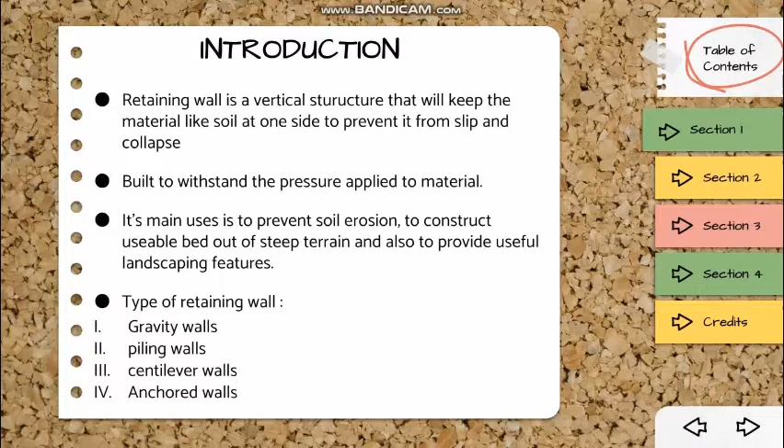As we all know, the retaining wall is the vertical structure that will keep material like soil at one side to prevent it from slipping and collapsing. It is built to withstand pressure applied to the material, such as earth pressure and hydrostatic pressure holding back. Its main use is to prevent soil erosion, to construct usable land out of steep terrain, and also to provide useful landscape features.

Bismillahirrahmanirrahim. My name is Muhammad Idham bin Buang. Now I will discuss our case study in section 2.

This is the retaining wall at Beverly Hills, Tanjung Bungah, Penang, 2017. This is our view on this case study. As you can see, they have a retaining wall.

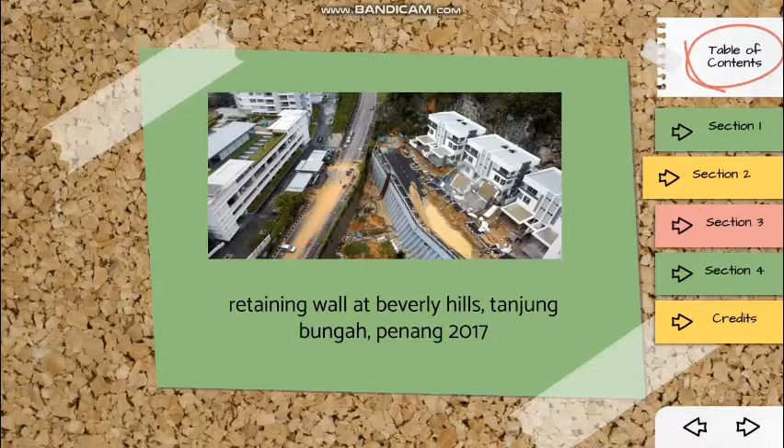About the case study: the retaining wall was used for a new development of private residential houses situated on a hilly area, comprising 20 units of 3-story semi-detached houses.

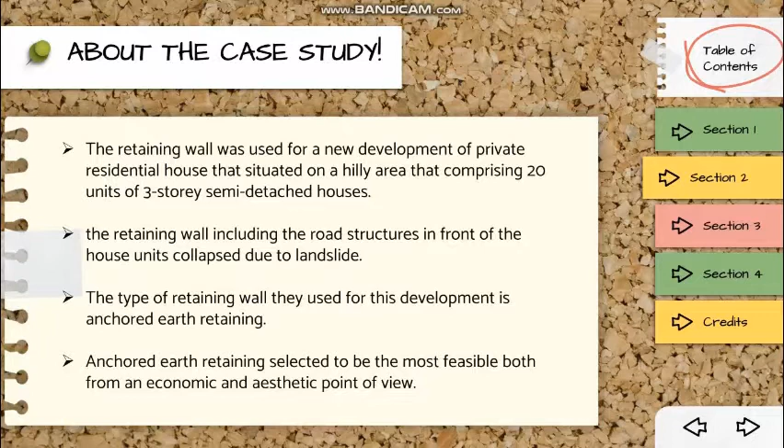The retaining wall, including the road structures in front of the house units, collapsed due to a landslide. The type of retaining wall used for this development is anchored earth retaining. Anchored earth retaining was selected as the most feasible option, both from an economic and aesthetic point of view.

So the factors of failure on this retaining wall are: first, heavy rainfall, and next, the high water table in the underground.

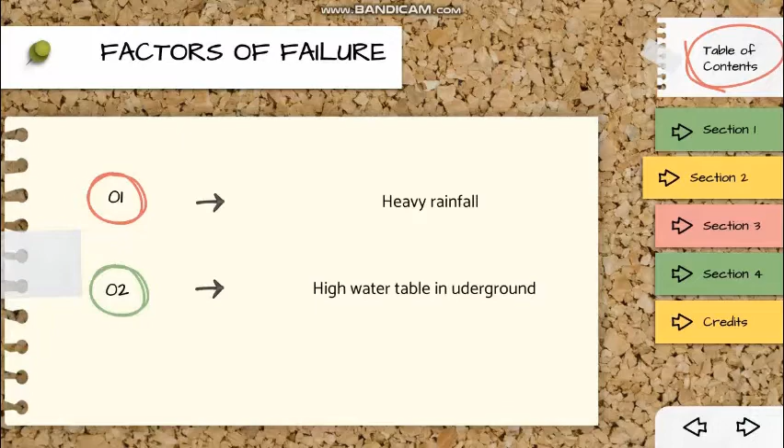Assalamualaikum warahmatullahi wabarakatuh. My name is Muhammad Izzuddin bin Muhammad Nordin. I'm going to discuss the design for a retaining wall that we found to be safe and economic.

The reinforced concrete cantilever wall was built in an inverted T shape. The construction material needed for this retaining wall is less than for a gravity wall, and the reinforced concrete cantilever wall can be manufactured as precast concrete.

The technical reason we chose the reinforced concrete cantilever wall is that the gap behind the RC wall will be backfilled with fill material not exceeding 300mm and well compacted to 95% of standard Proctor maximum dry density. The fill material should be approved by the engineer and JKR specification.

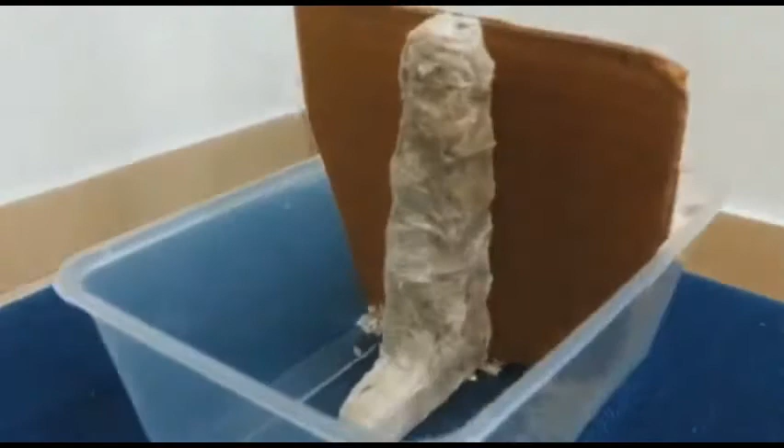For the conclusion of this case study: this incident has provided a more complete understanding of the geotechnical structure during the slip circle of a retaining wall.

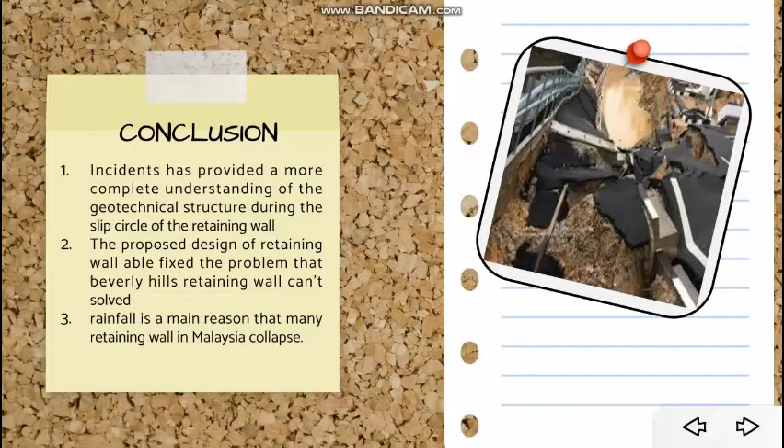Second, the proposed design of the retaining wall is able to fix the problem that the Beverly Hills retaining wall couldn't solve. Lastly, rainfall is the main reason that many retaining walls in Malaysia collapse.